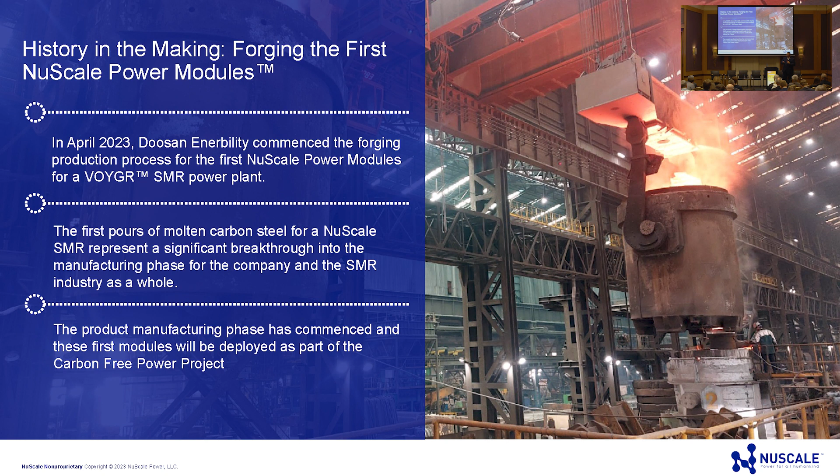We are ahead of all the competition. First and only technology licensed and approved - I'll keep mentioning that till anybody catches up. That's the bottom line. You don't have a technology until it's approved by a qualified and experienced regulator. We're going through that with KGHM support, delivering an application for general opinion, and we're working with PAA and the NRC, bringing all the information together so that PAA will be well positioned to assess the technology for an operational license at the right time.

A couple of items I'll touch on as we go forward. I've talked about manufacturing a little bit. The coping period is an important factor for any nuclear technology - in the unlikely event that something should happen, how much time do you have to support the critical cooling of the reactor to ensure no significant damage occurs? A NuScale reactor, each power module being so small and the core so small, the coping period is indefinite. You don't need to do anything, and it will cool itself over a period of time. I've got a slide to show you on that, and the unparalleled operational capabilities I'll also touch on in a moment.

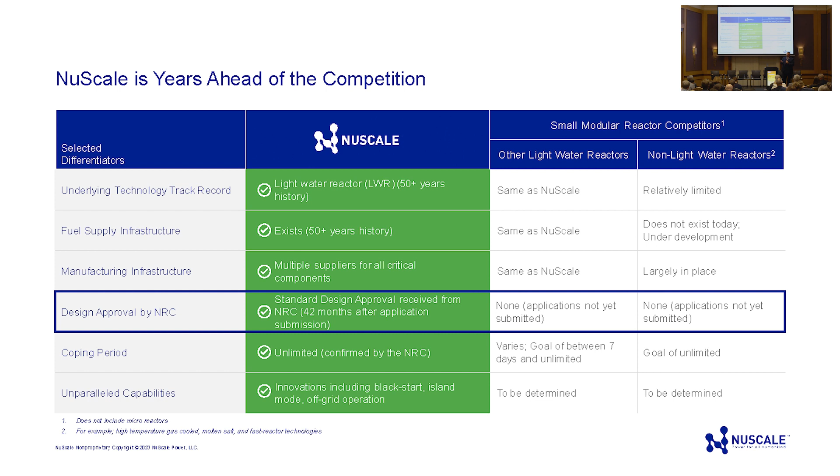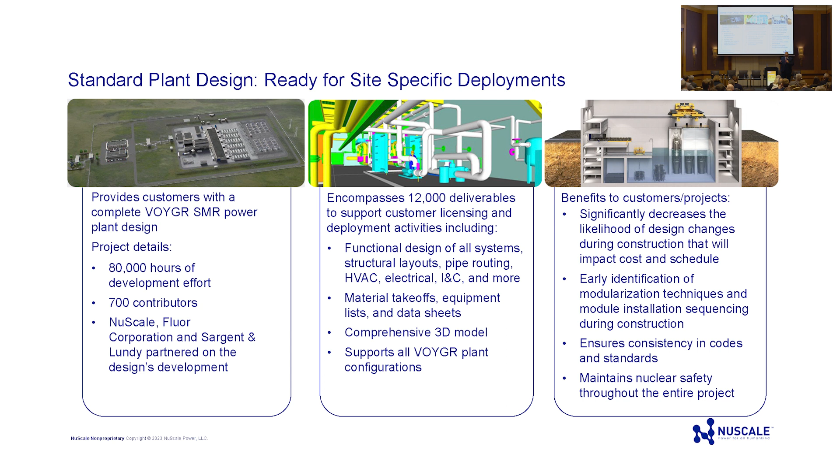To really position yourself to be successful in plant implementation, you've got to have a 3D model and your standard plant design done. You have to get the reactor, all your safety components, all your safety systems developed, evaluated, and designed. We've done it. The VOYGR-6, which Rob Rudich mentioned this morning, is the first implementation - the first design we're going to implement for the carbon-free power project. That's completely designed and ready to implement in Idaho. We have a plant parameter envelope that says this design can be implemented in a number of scenarios, situations, and sites. It's ready, and it's proven.

Just for a quick reference, I want to give you a view of the NuScale Power module and show you its size, the fact that we've taken into account all the components. I think the number one thing to take from this slide is the ability to ship to site fully assembled - there is no on-site manufacturing of a NuScale Power module. If the site happens to be located in a difficult to get to position, we can disassemble it and deliver it in four major components and then just bolt it together at the site. That's the difference between assembly and manufacturing. There's no welding to be done, other than the flanges - once you get inside the reactor building, you flange those up. But the reactor itself, there's no major manufacturing to be done on site. It comes from the factory complete.

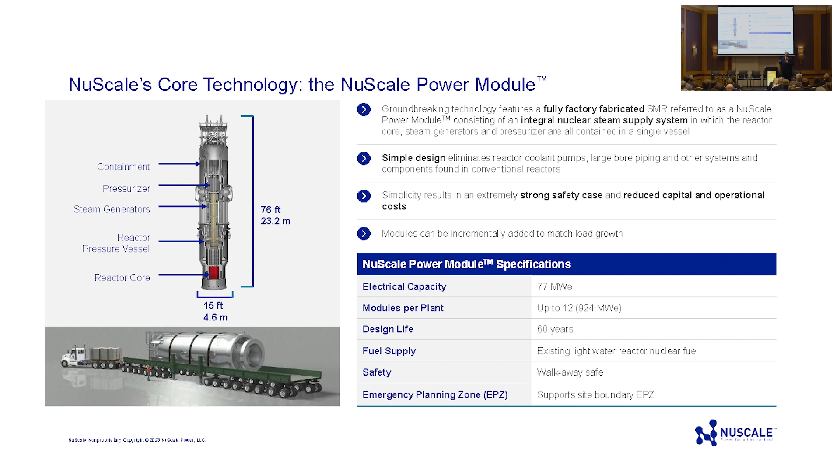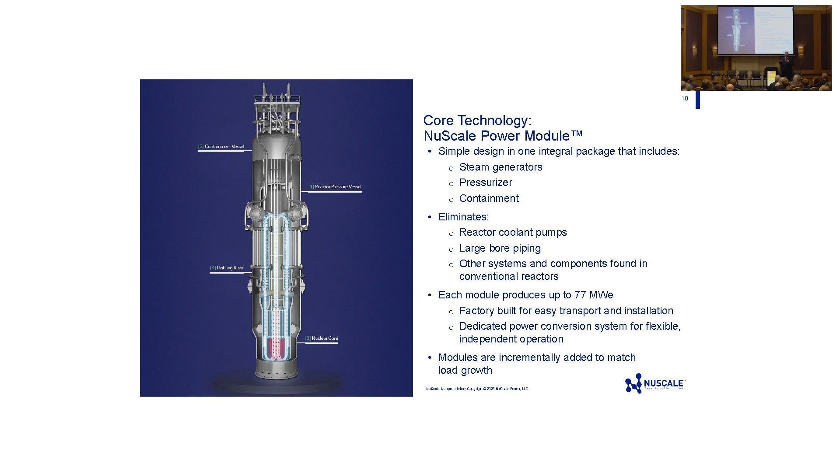I wanted to include this slide because it's a better image, and also for the last bullet: the NuScale plant is designed to have multiple modules in sequence, in an array. You can build that facility to house any number of NuScale Power modules and add them incrementally as you need to. That can also lend to making the reactor building a bit bigger and starting with, say, 300 to 600 megawatts sized number of reactors, then adding more as time goes on. All it costs is the addition of the reactor and the associated power conversion equipment - steam turbine and generator, etc. That can be very economical.

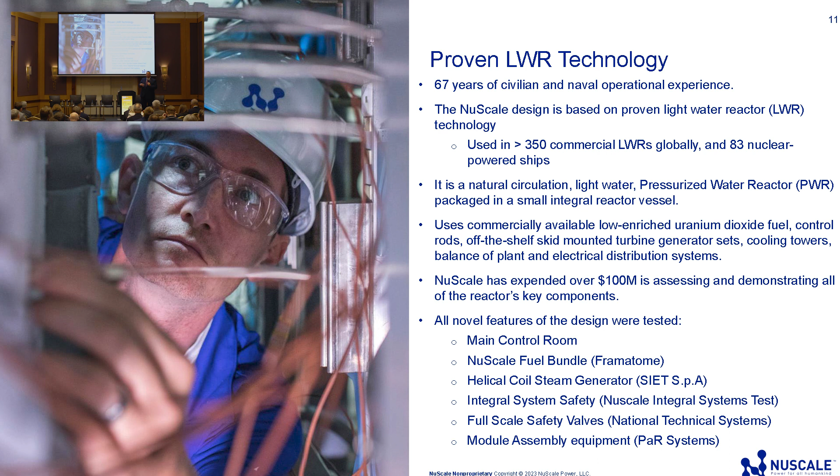I've heard a lot of talk about proven technology. NuScale's design is a pressurized water reactor, based upon proven technology - there are greater than 350 commercial operational PWRs around the world. I can't even count the number that have been used in U.S. Navy nuclear subs and nuclear aircraft carriers, etc. - the number is pretty significant, though I can't really talk about that number. But the reality is we took that proven technology, saw where the industry was going, and decided to make it smaller, more accessible, and the key was to make it so the units could be delivered fully assembled from the factory. Everything's factory built - repeatability, high quality, etc. Just for scale, the size of the NuScale Power Module is about the size of a steam generator of a large PWR.

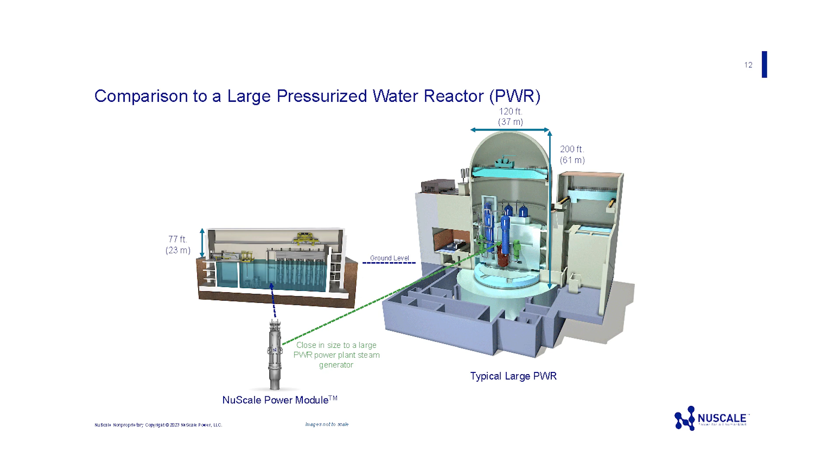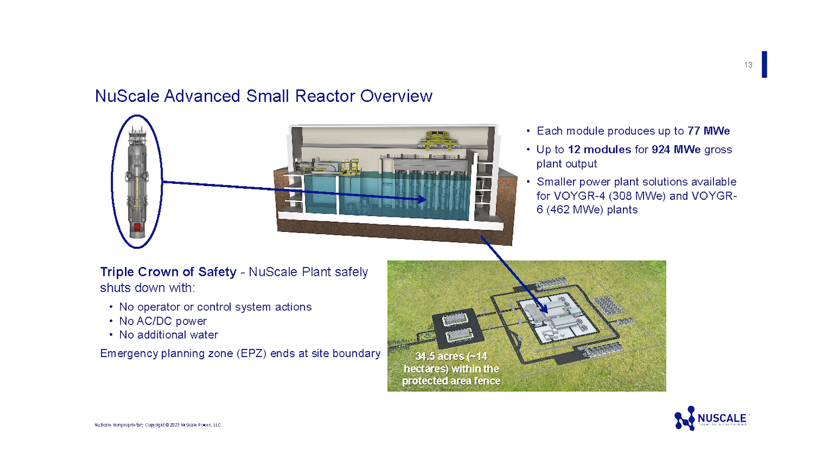I put this slide in here for two different reasons. One was to touch on the size of the overall plant, which is about 34.5 acres for a VOYGR-12 configuration. That's 924 megawatts on about 34.5 acres. That's pretty sizable. And the other element was to denote the three key elements of our triple crown of safety, which are no operator or control system action, no AC/DC power, and no additional water required for any kind of an event. The last item is the emergency planning zone ends at the site boundary. I'll come back to that in a moment.

Important to note, it's not always intuitively obvious. We all talk about SMRs, and we're all thinking that an SMR from one site and one plant to the next is going to be identical. Most of them really aren't, because they're a little bit bigger, and you have to do a large amount of manufacturing beyond assembly. It's manufacturing, and it's a lot of key effort on site. With the NuScale Power Module, you don't. They come out of the factory.

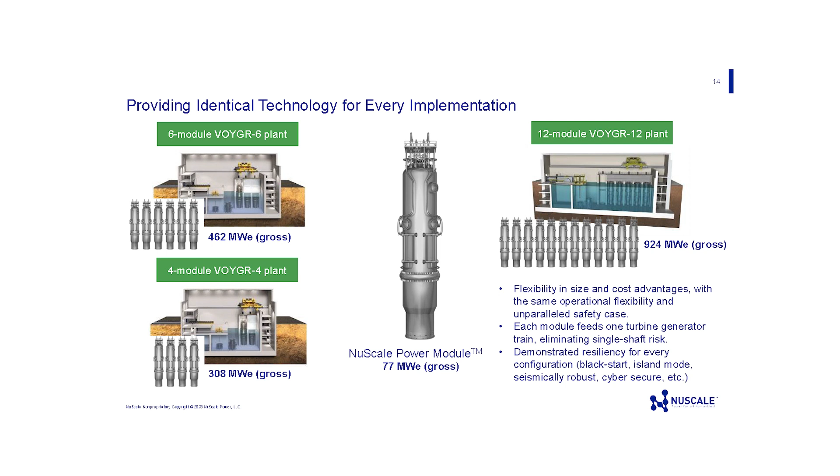So if you built a 300 megawatt NuScale facility, a VOYGR-4, in one area of Poland, and a VOYGR-12 in the other area of Poland, those reactors are identical. They come from the factory the same. So the same people that operate and work on the VOYGR-4 can work on the VOYGR-12, on the VOYGR-6, et cetera. The same parts. That makes for economical planning for maintenance, operation and support across the country and across the region. It's just not always intuitively obvious.

It allows for close proximity to points of use. So, district heating, you can put the plant right next to the heating circuit or integrated into the heating circuit. For working with a steel plant, it could be right next door. Does it need to be aligned with supporting a small community for electricity, for heat, et cetera? You can place the unit really as close as the constituents would allow it to be.

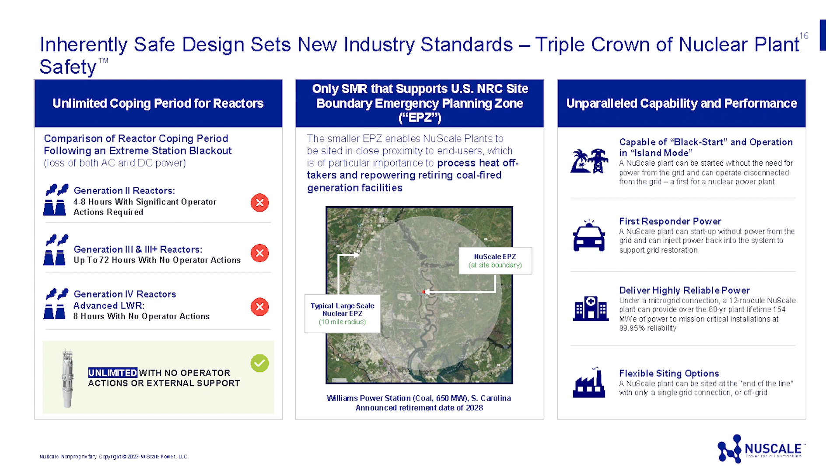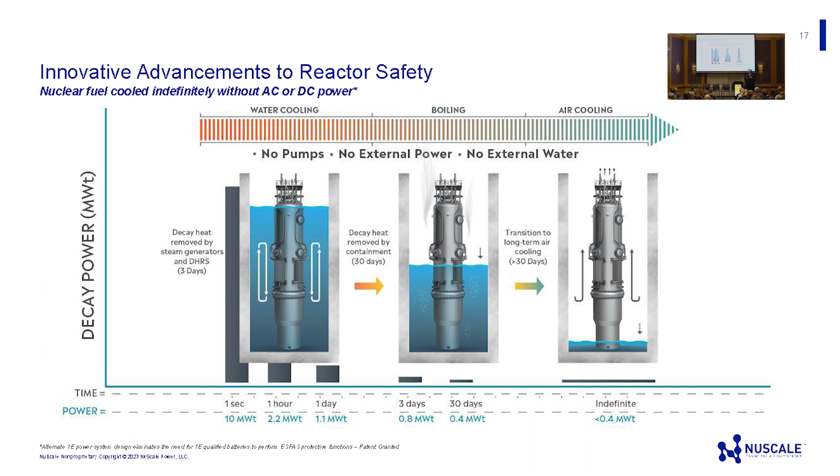I mentioned coping period. This slide is just to indicate that. The core is small. The design is such that you will water cool it, and if anything happens and there is no more water, it'll air cool. One key thing I don't think is always understood about NuScale's technology: the whole goal was to design the plant such that you could provide enough energy to support multiple industries.

I'm just checking to make sure I don't run you too far into lunch or to my next speaker.

It's not always, again, intuitively obvious. Because we have multiple reactors in an array, you can support multiple industries simultaneously. That is not easy to do with a singular reactor. That's one differentiator when I compare ours to our competitors: having multiple smaller reactors in a single facility allows this to be easily managed.

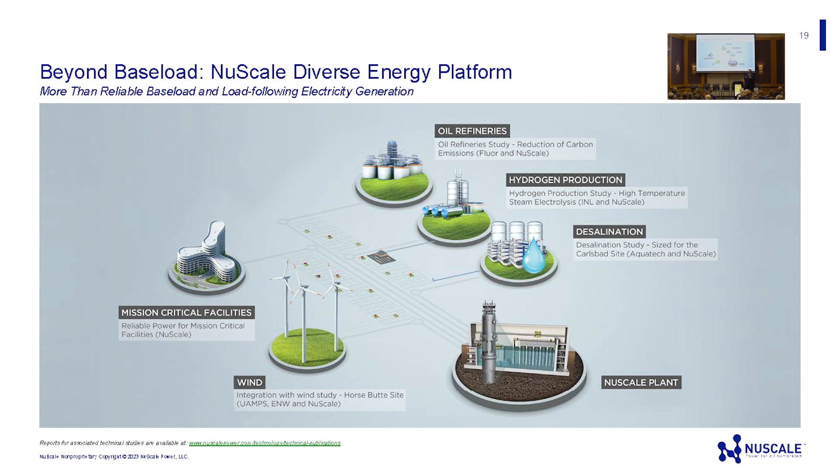We've been working with a number of entities really focused on hydrogen, ammonia, and other products. We've done a number of studies, and I do want to point out that there is significant opportunity in Poland to be a hub, beyond being an SMR hub, a hub for hydrogen production, ammonia production, and I heard the discussion of nitrogen. For certain countries we've been talking about nitrogen for fertilizer, desalination, et cetera. To be able to do this from Poland to support the rest of Europe would be incredibly significant. Be the global leader.

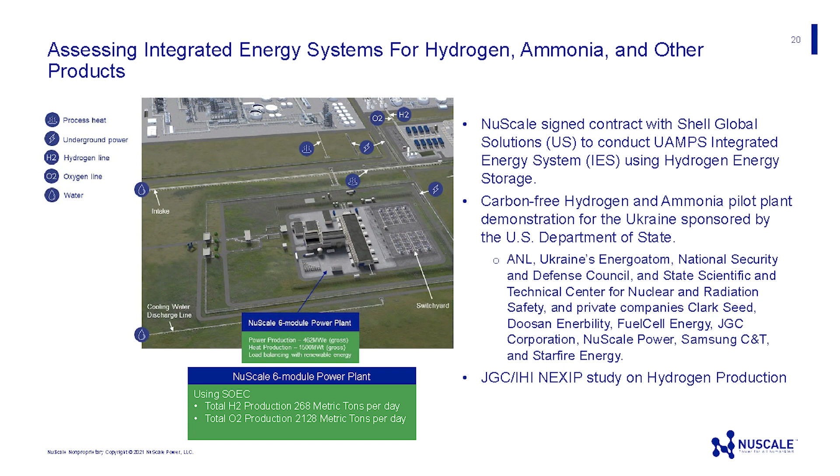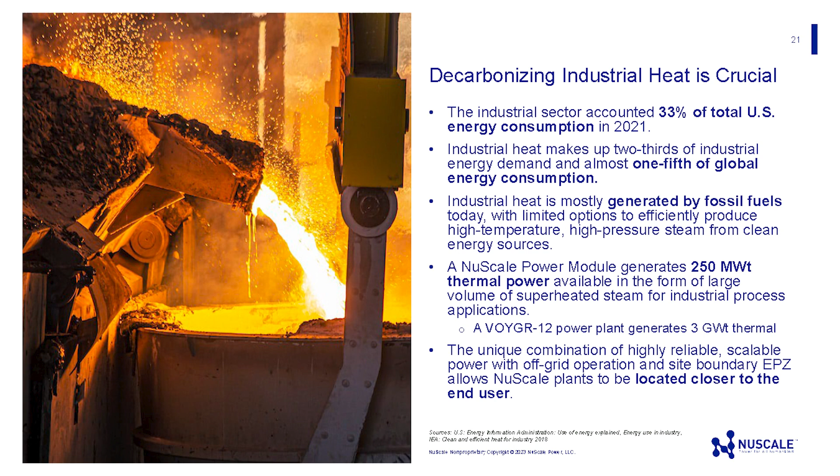You may have seen recently that we announced some advancements, and I want to make sure I get this right, so I'll go to my notes here. Advancements in our understanding of our own design and getting proven by industry to support heat generation, to support the steel industry, et cetera. The biggest element I wanted to raise here is that a VOYGR-12, which we always talk about in megawatts electric, can deliver 3 gigawatts thermal. That's an awful lot of heat to be able to deliver to industry.

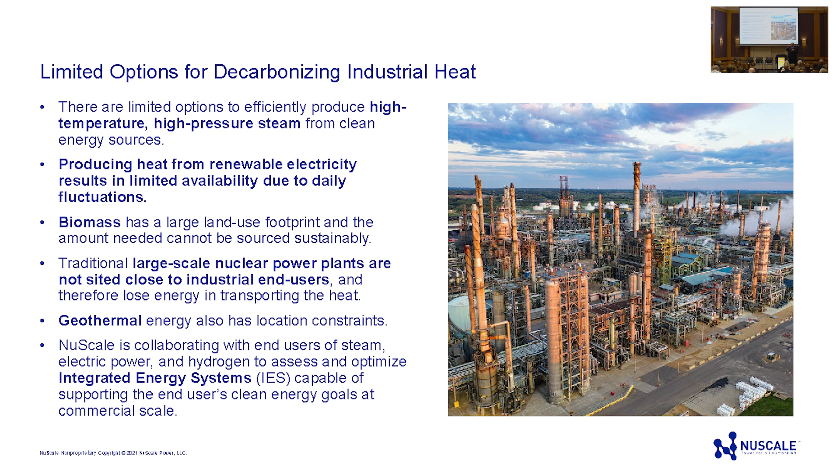In advancing our technology, we assessed the capabilities of others, not just SMRs, to deliver energy for industry, and realized there are limitations in actively supporting use. A large gigawatt-sized nuclear power plant cannot be sited close to the point of use, so could you use that for district heating effectively? Most likely not—it's too big. You'd need an emergency planning zone much greater, causing inefficiency in delivering heat, making it complicated and not cost effective. The NuScale Power Plant has a small emergency planning zone, meaning it can be close to the point of use, providing for easy application.

We understood that the majority of industry—and this is based on a lot of US effort, since we got support from the US Department of Energy, so I apologize it's very US-based—recognized that 300 degrees Celsius was a magic number for industry throughout the US and other areas. So we targeted that, but we also realized you can economically use a small amount of energy to raise the temperature and pressure of the steam coming out of a NuScale Power module to support the rest of the major industries listed here.

So for district heating, desalination, most of petroleum refining, and pulp and paper mills—which, by the way, represent a large number of coal-fired power plants in the US. I used to support those in my old steam turbine days; there are hundreds filtered throughout. As they age, believe it or not, there's not less need for pulp and paper, surprisingly. We all think we're paperless, but we're really not, as I've got my papers right here. The energy need is still necessary and keeps increasing. So how do you deliver that cost effectively to remove those coal plants and make it work?

One thing I didn't prepare a slide for this time is how to reutilize the resources of a coal-fired power plant for a NuScale power plant. It doesn't take much effort to take a steam turbine maintenance person or control room operator from a coal plant and bring them up to NuScale standards. For a NuScale plant, we only need a small number of operators—a total of 9 for all shifts, all the time. You do need an engineering degree, etc. But during plant development, from environmental impact through construction, you could be developing those resources. It's not overly difficult to do.

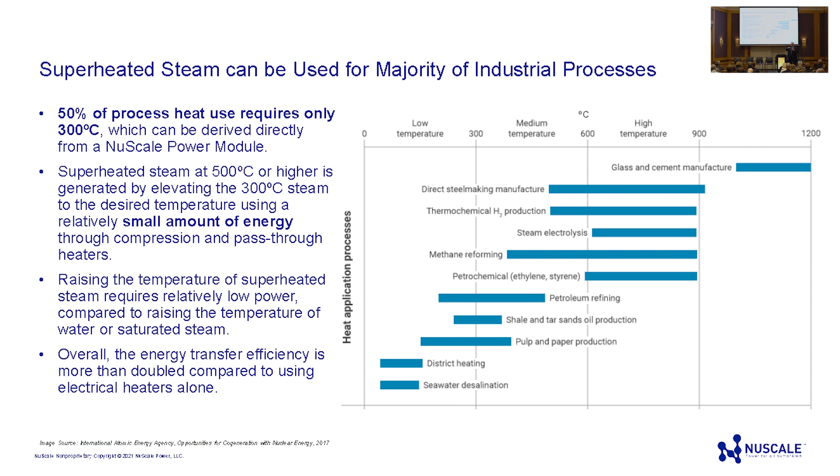It's always a question from those communities: okay, you want to close the coal plant, but what are you going to do for us? How are you going to help the community progress, not just bring in new technology that leaves us all behind? That's something we've worked very hard and diligently on, to build a relationship moving forward. That's something I think we all need to work together on, as we talked about elevating citizens' understanding and appreciation of nuclear, to really engage them—not saying nuclear is for the elite, but that nuclear is for all of us.

I mentioned the steam compression efficiency and the 3 gigawatts for VOYGR-12. There was something I really wanted to say here—oh, I did mention the concept of steam compression and how it can efficiently bring up the pressure and temperature. I think that's all I really wanted to cover.

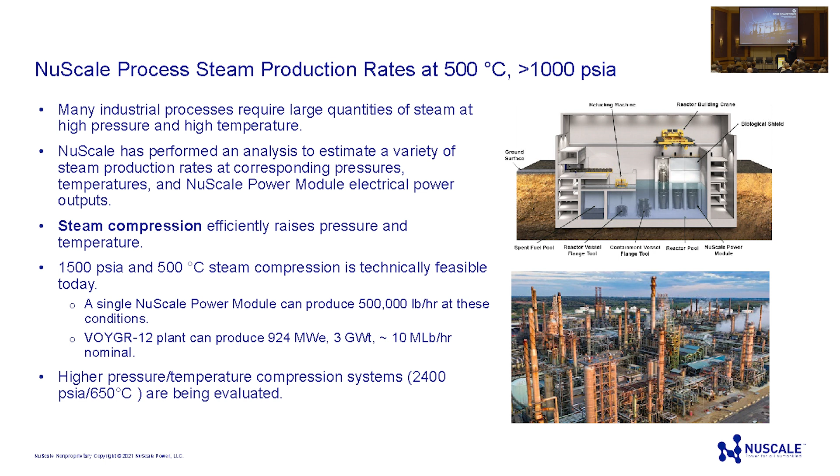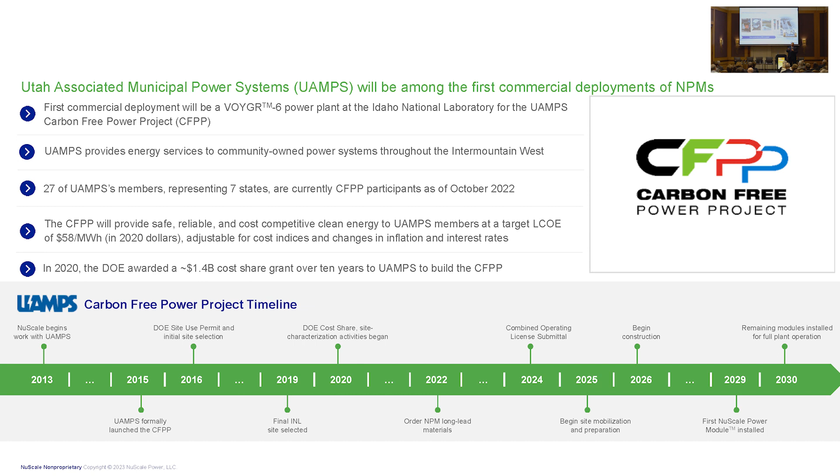I mentioned the carbon-free power project and the timing for that—I don't want to belabor this, I just wanted to give you the context for later. And I did want to explain the value, which I think is important: manufacturing the NPMs in a factory means the entire plant gets constructed while those modules are being manufactured, which cuts down the entire cycle time.

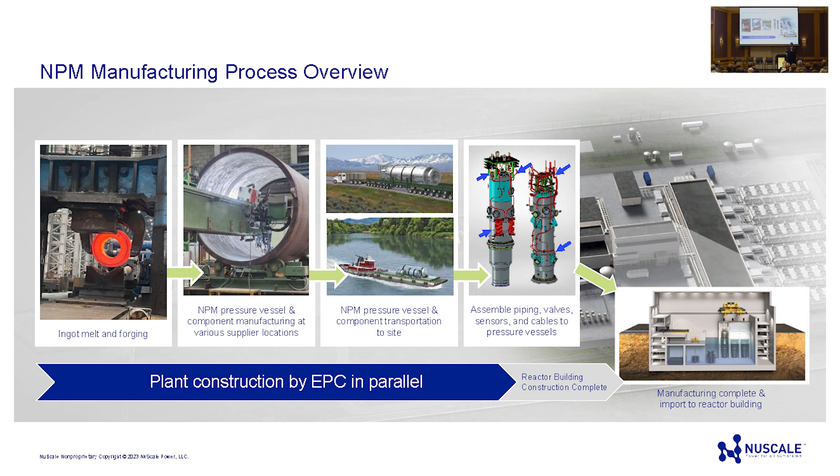This supports the theory of Poland being a hub for SMRs. This is just one example, and I know others can point to additional technologies, but also customers of ours looking to expand their sphere of influence are looking at Poland and Central Europe as a primary point of reference. Poland, keep moving at the pace you're moving, or a bit faster—you are the hub, you will continue to be the hub, and you'll be the center point for global implementations for all SMRs. Keep up the pace, keep up the work, and let's leverage the supply chain to deliver.

Feel free to come visit us and take a good look at our plant simulator, to understand how simple and easy it is to operate a NuScale plant. We're out in Corvallis, Oregon, and we're available.